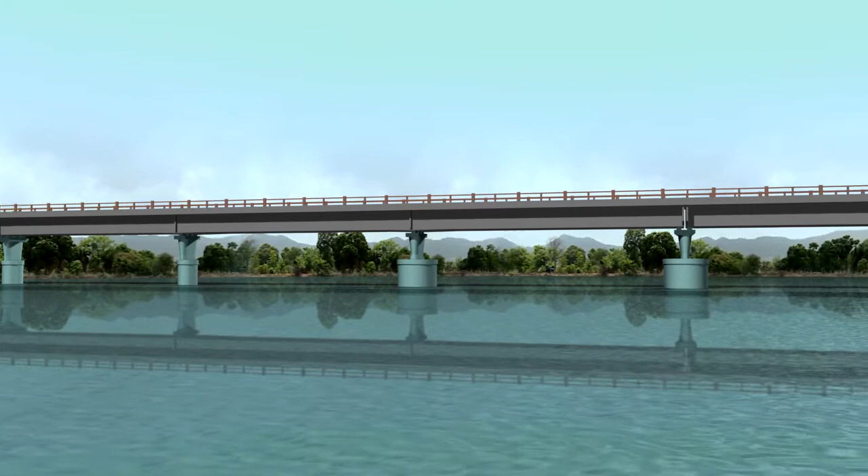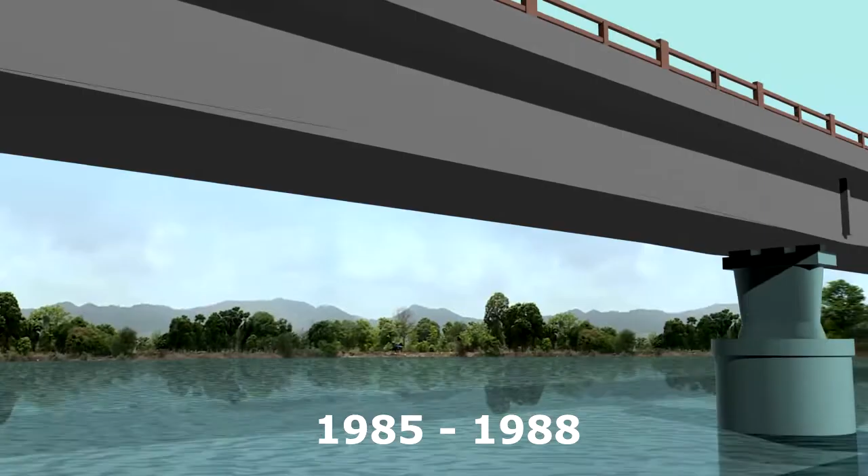Vaitarna Bridge, connecting Safale with the main district road and subsequently to the Mumbai-Ahmedabad highway, was constructed during the years 1985 and 1988. The bridge consists of 8 spans. The main spans are 45 meters each, while the end spans are 25 and 30 meters respectively. The total length of the bridge is 325 meters.

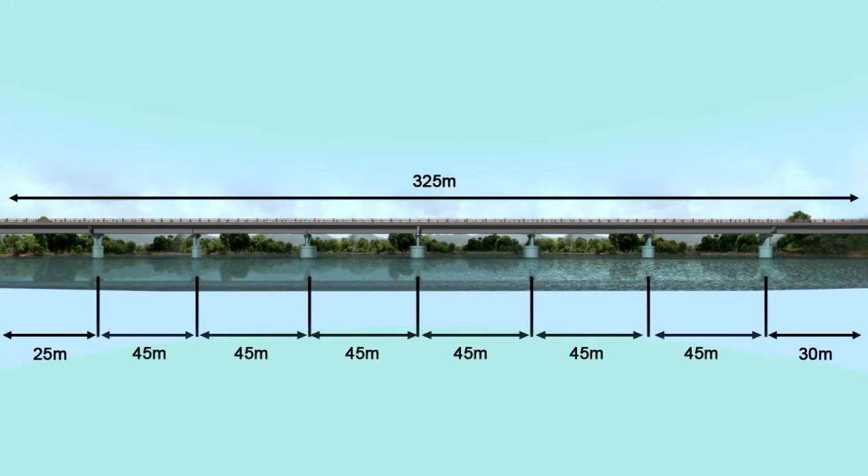The foundation of the bridge is a well foundation and the substructure consists of 7 RCC piers, P1 to P7. The superstructure consists of RCC box girders. The width of the carriageway is 7.5 meters.

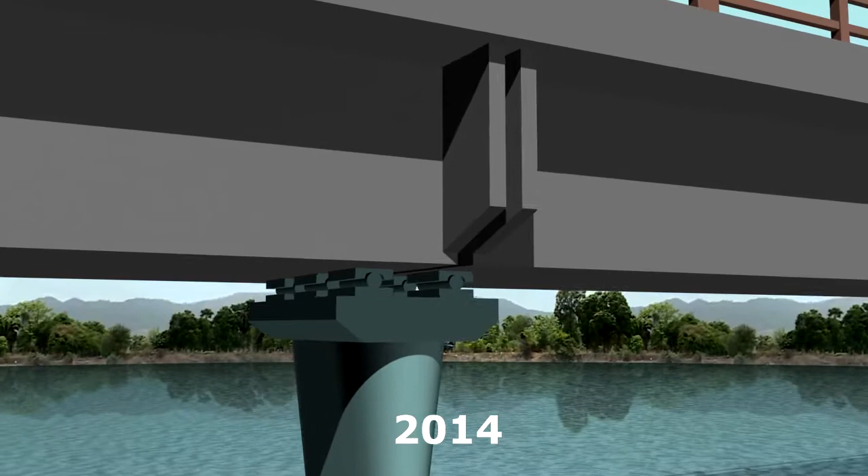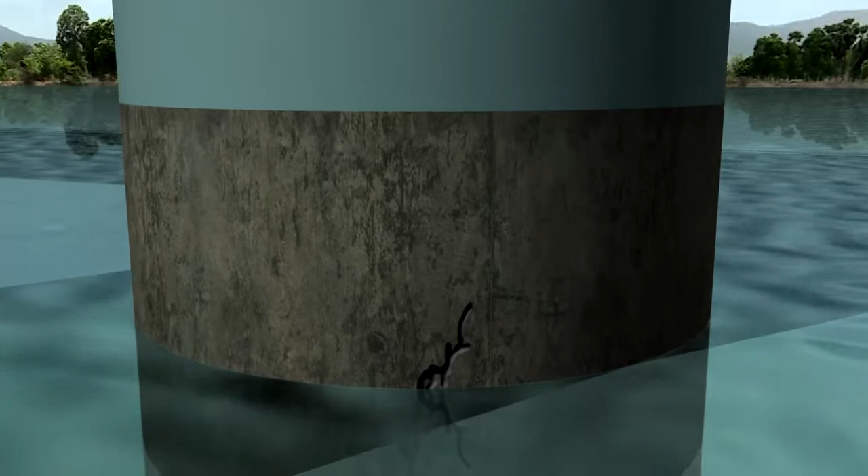In the year 2014, it was found that the pier P5 was tilted by about 15 to 20 centimeters on the upstream side. The neoprene pads were also displaced and the superstructure was dislocated. A zigzag vertical crack was developed in the well up to the well cap. The width of this crack was nearly 30 centimeters at the bottom and 4 to 5 centimeters at the top.

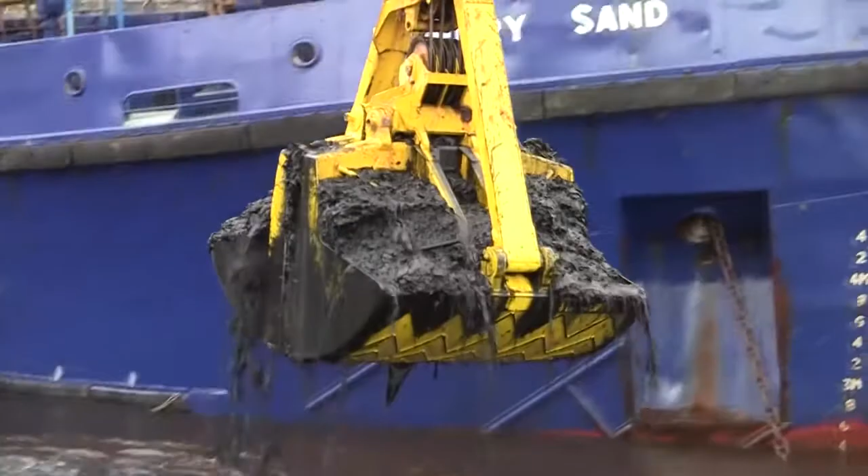The problem had been created mainly due to the sand dredging carried out over a period of many years. This had eroded a substantial part of the base of the well foundation of P5. Only 30% of the area of the well bottom was resting on the rock and it was in a destabilized condition. Also, the depth of the water had increased by 10 to 12 meters.

This animation showcases the innovative solution that was used, the implementation of which was a big challenge. It was important to stabilize the well foundation of P5 to avoid further tilting before the actual rehabilitation work could commence. The scheme prepared for immediate stabilization of P5 was as follows.

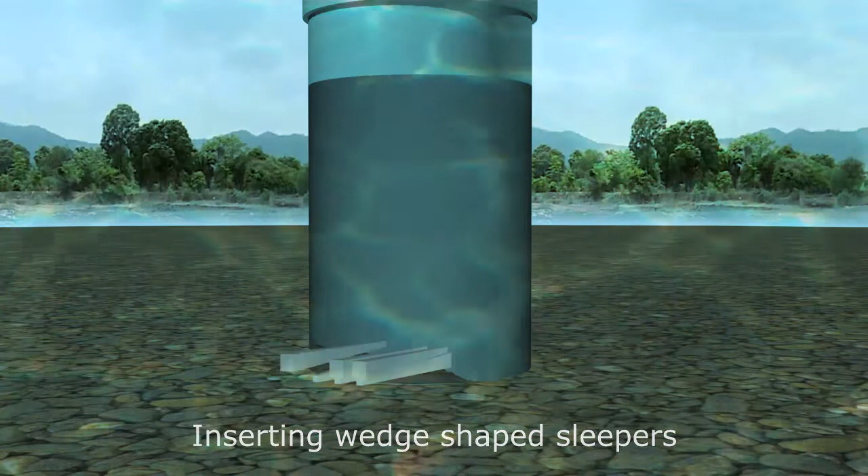Initially, the gap between the well bottom and the ground was filled up by inserting wedge-shaped precast M40 RCC sleepers of required sizes in layers. The remaining gap was filled with MS plates. The loose material on the sides was cleared with compressed air pressure. Next, an RCC ring beam of size 500 mm by 500 mm was cast underwater with quick setting adhesives.

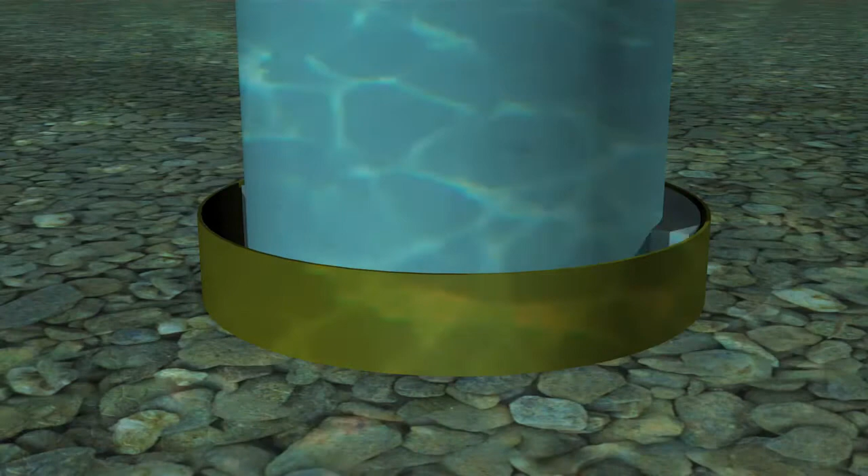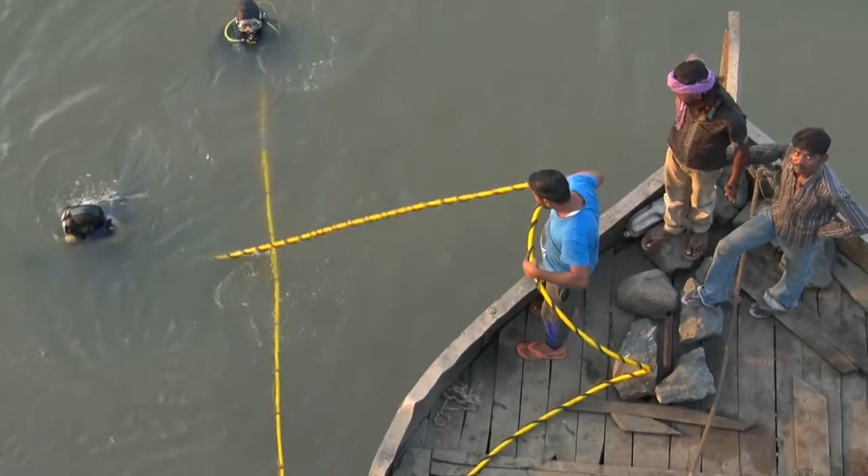In the next stage, cement grouting was carried out at the bottom of the well with required pressure using mechanical equipment. The depth of the water was about 15 to 16 meters. Hence, expert scuba divers had to be engaged for this work. The stabilization was done to stop further tilting of the existing well and also to bring the existing tilting within the permissible limits as prescribed by IRC Code 78.

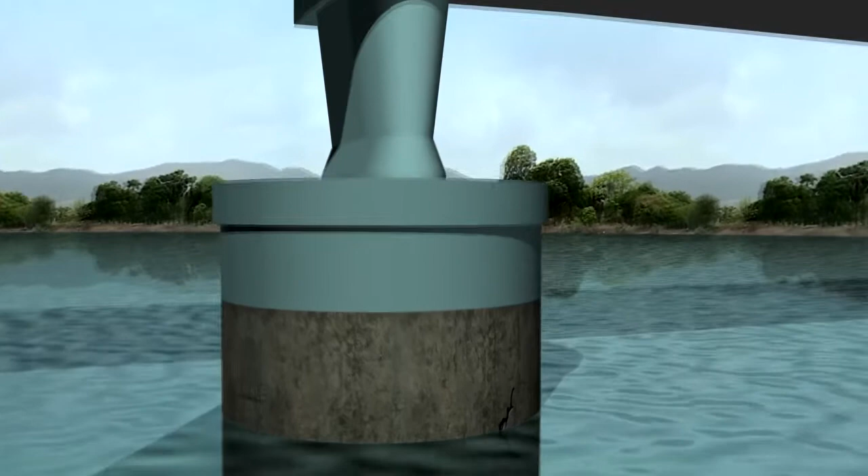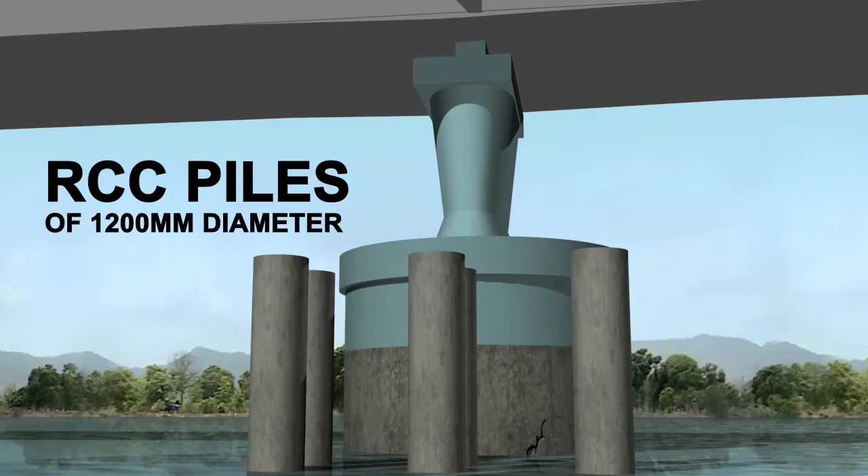After this, it was time to commence the rehabilitation work so as to provide alternative support to the superstructure and abandon the existing pier well. Accordingly, it was decided to provide RCC piles of 1200 mm diameter on both upstream and downstream side of P5. A total of 12 such piles were planned, with 6 piles on each side of the pier well, till the height of well cap.

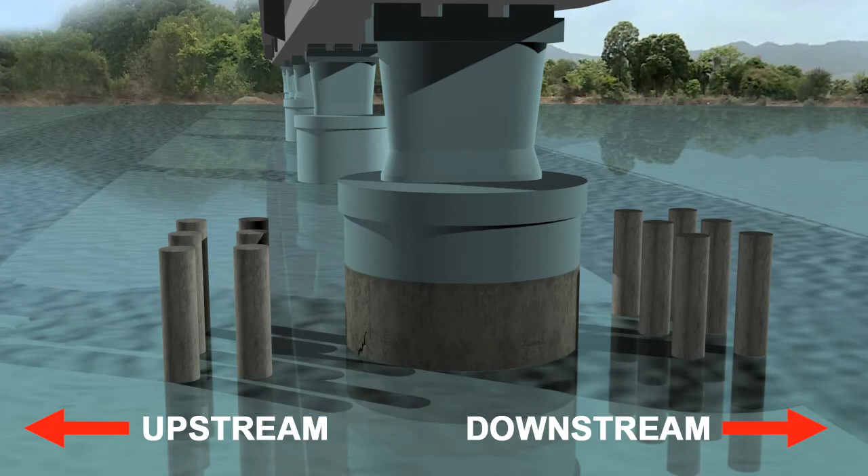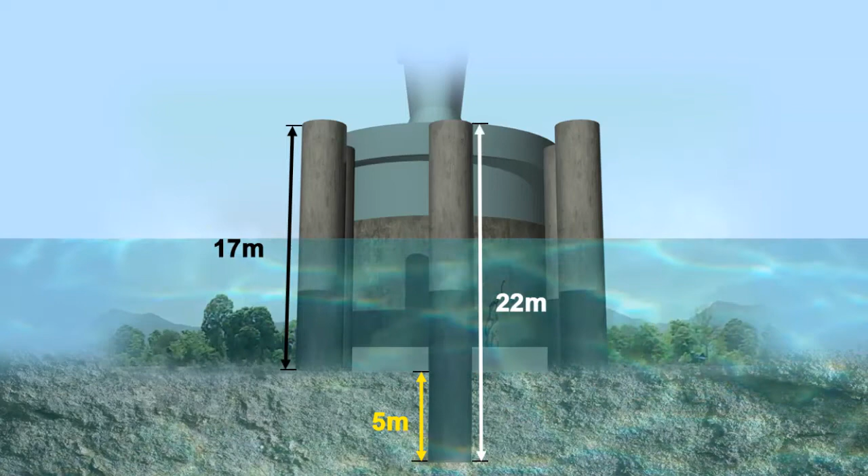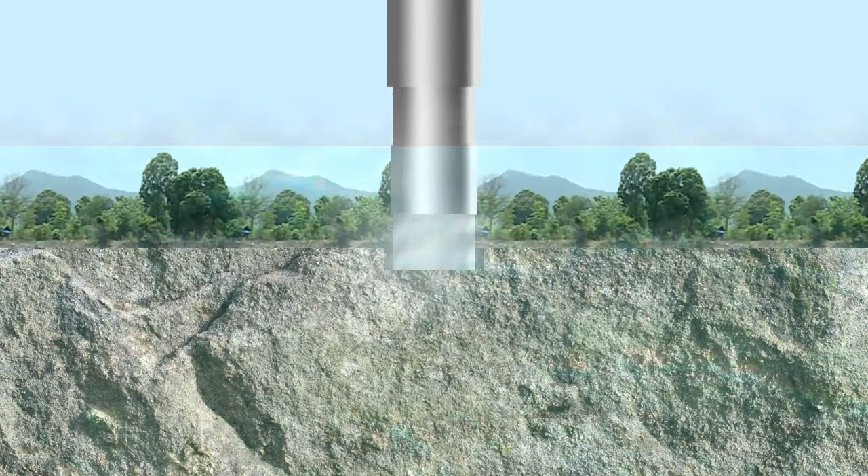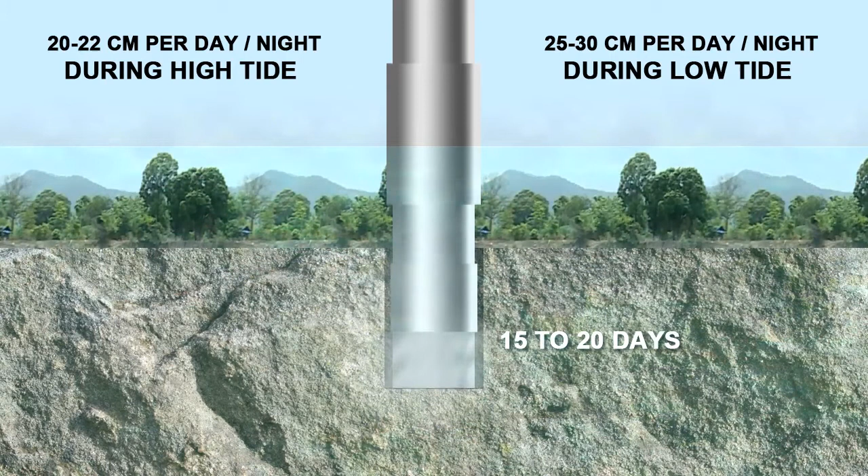The average height of piles up to cap level was about 17 meters, while the socketing depth in rock was approximately 5 meters. Thus, the total height of a pile was about 22 meters. While socketing, it was important to keep a constant pace of execution, as due to hard rock, pile excavation was about 20 to 22 centimeters per day or night during high tide and 25 to 30 centimeters per day or night during low tide. Hence, it took almost 15 to 20 days on average to achieve 5 meter socketing depth for one pile.

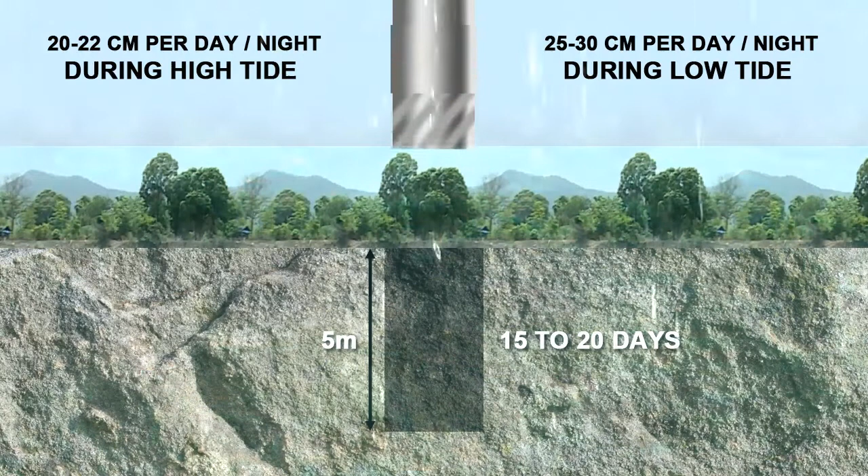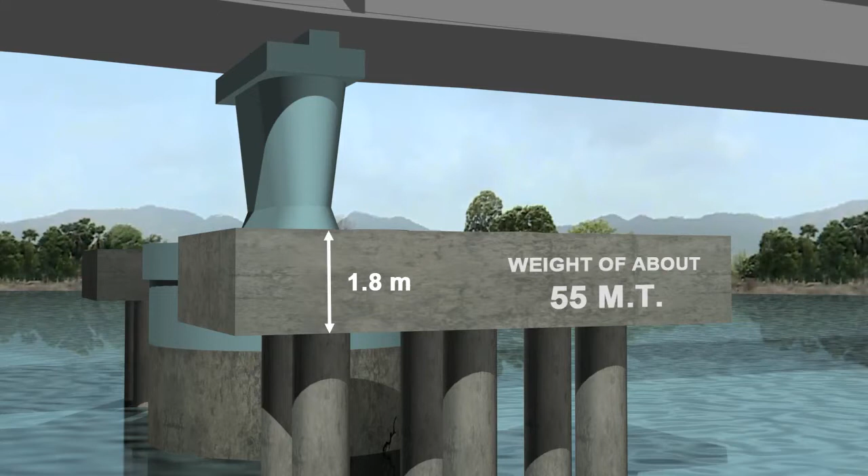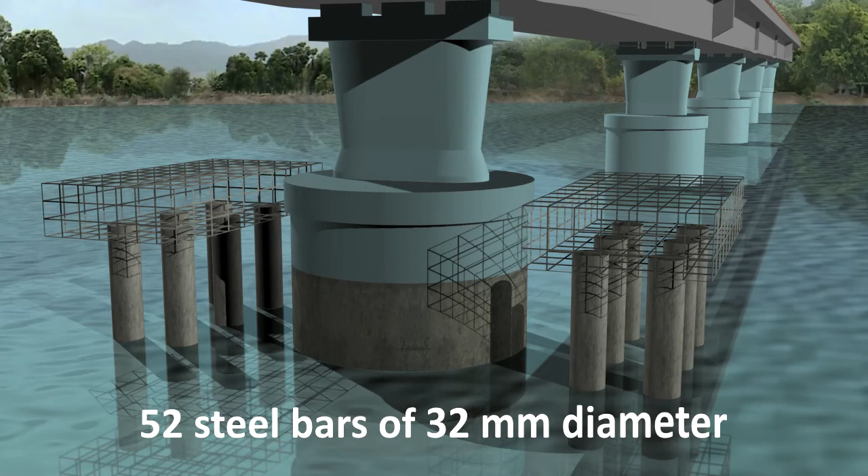Considering the urgency of work, the piling was continued even during monsoon, except on high flood days. The pile cap was of suspended type with depth of 1.8 meters and weight of about 55 metric tons. The formwork was designed in such a way that it provided supports from the pile itself. 52 steel bars of 32 mm diameter were used for reinforcement of piles.

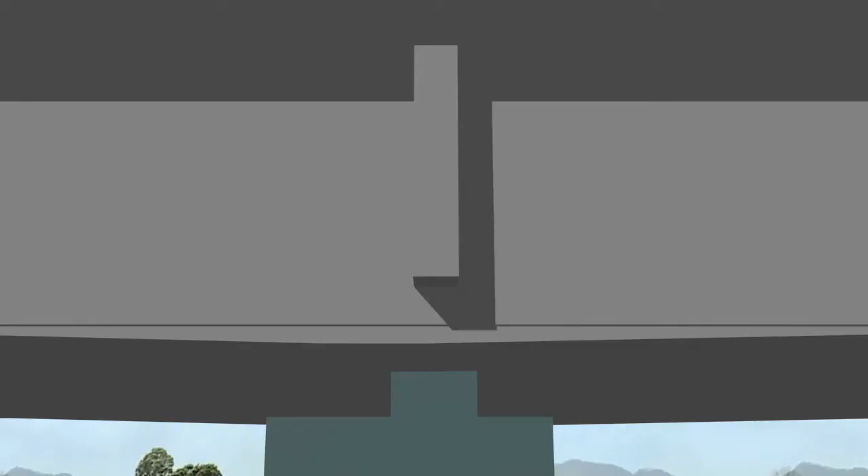Circular monolithic RCC columns of 1500 mm diameter and 2250 mm height were cast over the pile cap to support the portal beams. Rectangular portal beams were cast except in the middle portion of the existing RCC pier. The superstructure was lifted by hydraulic jacks and was temporarily supported on portal beams. Later, the existing RCC pier was dismantled so as to cast the remaining portion of the portal beam.

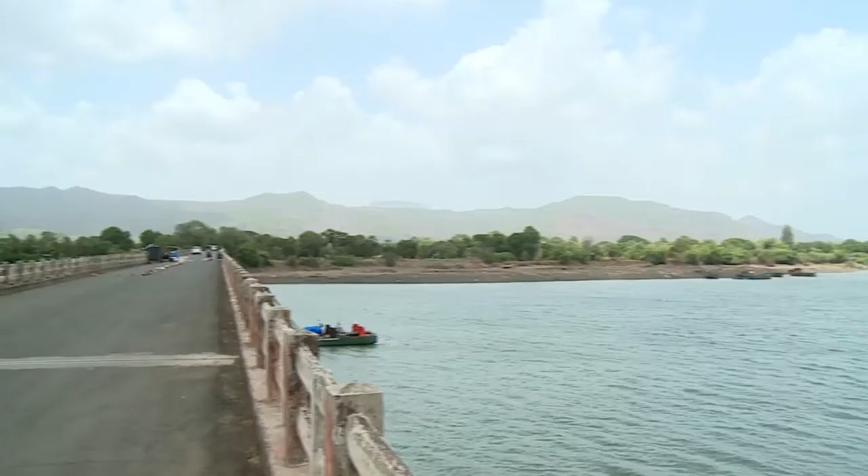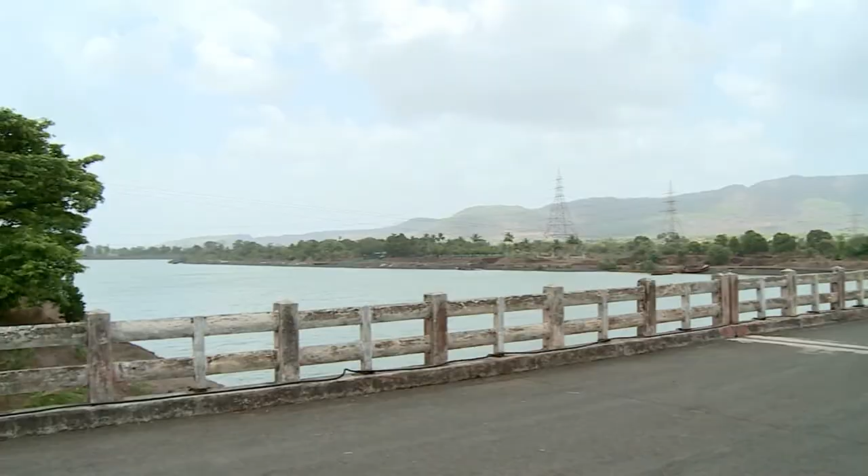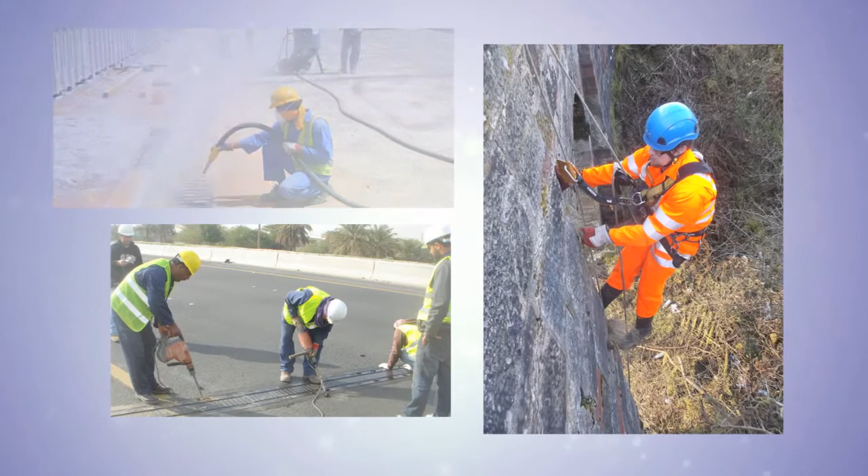Meanwhile, the light vehicle traffic on the bridge was suspended to carry out the replacement of expansion joints and the bearings. After a curing period of 28 days, the pedestals for bearings were cast and neoprene bearings were provided. Finally, the superstructure was lowered on bearings. During this period, the inspection of superstructure and external pre-stressing was carried out using different tests. Necessary repair works were carried out simultaneously based on the test results.

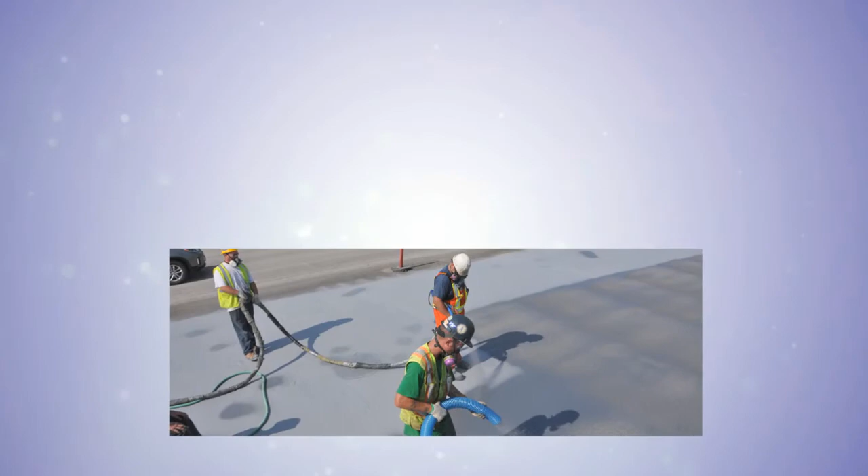The observation of one vigilant engineer was picked up by the top authorities at PWD with all seriousness. The right thinking and swift action on their part has not only strengthened the bridge, thus increasing its longevity, but has also averted a possible mishap.